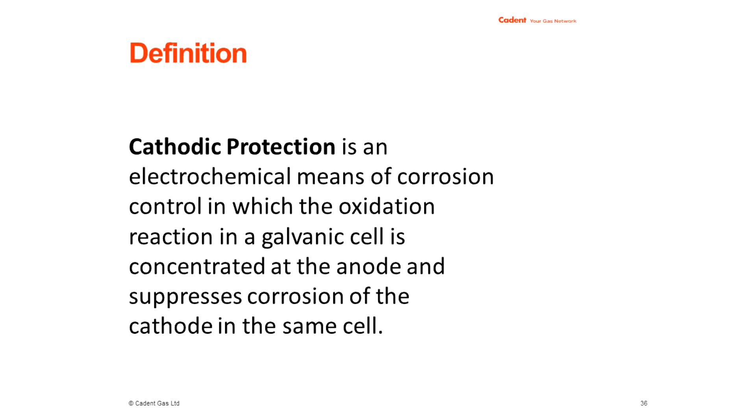If you were to Google cathodic protection, you'd get a definition that looks something like that. But essentially, cathodic protection is a system we utilize to prevent corrosion of our steel pipelines of all pressure ranges. It's not just employed by Cadent, it's used in all gas and oil industries and even the water industry.

Cathodic protection, although it's used to prevent corrosion, is merely a secondary method of protection. Our primary method of protection is the pipeline coating.

So as many of you are probably thinking, if you've got your pipelines coated, then where's the requirement for cathodic protection? Well, no matter how well a pipeline is coated, there's always going to be deficiencies in it somewhere along the line, whether it be at the valves or flanges or anywhere that's awkward to coat or apply a decent wrap to the pipe. That's where cathodic protection comes into play. At these small locations and defects in the coatings is where the CP will protect the pipe from corrosion.

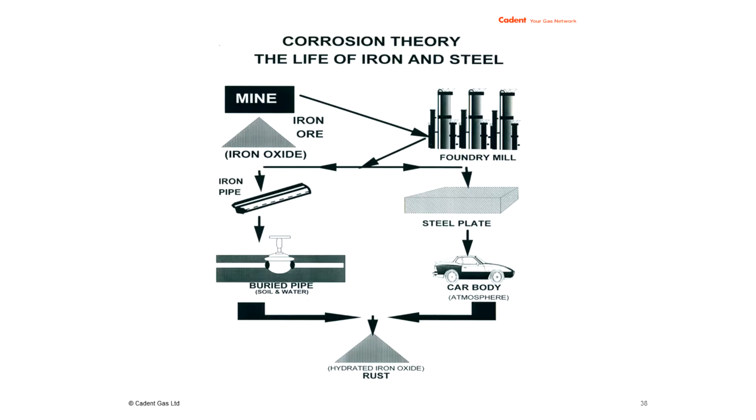There's a little bit of theory of where the steel comes from. The steel is mined in iron and comes out in the form of iron ore, and goes through foundries and various processes to eventually result in the steel that we see and recognize today, whether it be in cars or in our pipelines. But the steel will always try to return back to its original form, and it does so in the form of rust, which is hydrated iron oxide.

There are 4 requisites for this corrosion to occur. You need an anode, a cathode, electrolyte, and a metallic connection.

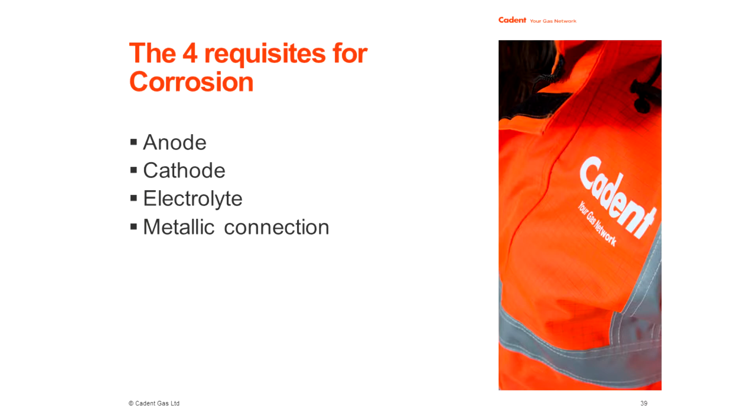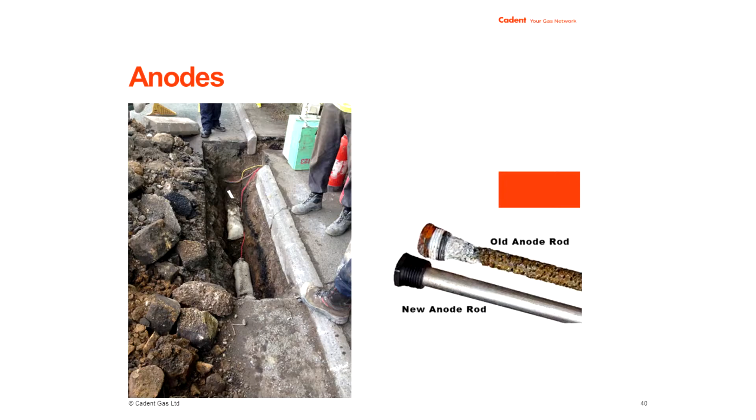So those are the anodes. The anodes are essentially what we sacrifice to protect our pipelines. You can see the anode bags in the excavation on the left-hand side there, and also the picture on the right shows a new anode rod and an old anode rod out of a heater element, so you can see the effect corrosion will have on these sacrificial anodes.

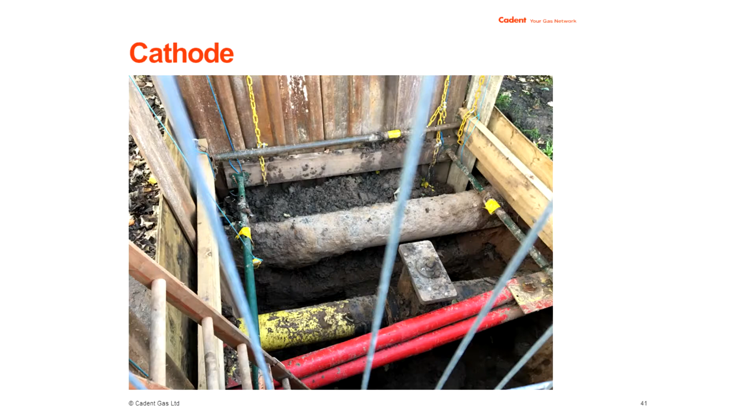The cathode is what we're trying to protect. In the picture there, in the center, you'll see a yellow pipeline running through the middle, which may look like a plastic pipe to some of you, but that is in fact one of our intermediate pressure pipelines with a plastic polyethylene coating. So the cathode is what we're trying to protect. We sacrifice the anodes to protect the cathodes.

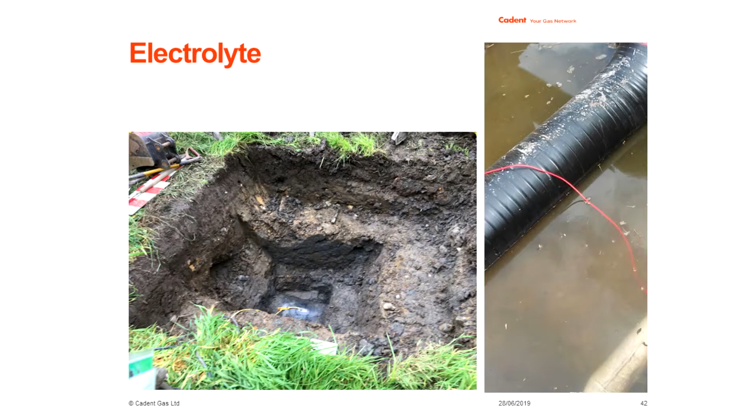For the electrochemical process to operate, you need an electrolyte. Both the anodes and the cathode need to be submerged within the same electrolyte. This electrolyte has to have oxygen and moisture to allow the current to flow. You can see an excavation there with our pipe in the middle of it, and in that case, the soil is the electrolyte. The one on the right-hand side, obviously, the electrolyte is the water surrounding the pipe.

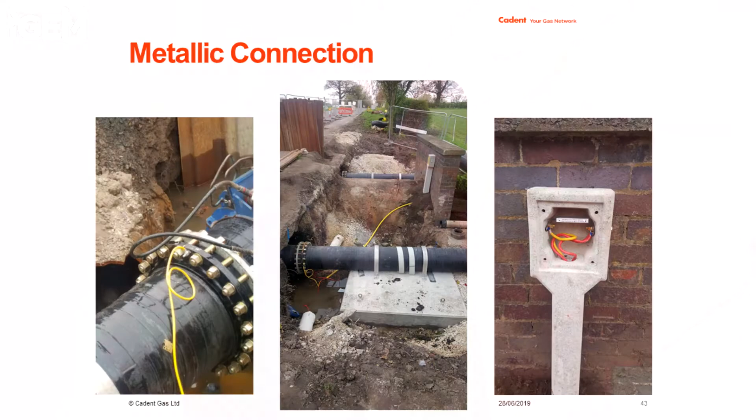You need a metallic connection. You have to complete the circuit. And this metallic connection is provided via what we employ pin brazers, where we'll connect onto the pipeline. As you can see on the left-hand side, this wire will then run through the soil into the ground and up into a test post, where there'll be more wires that also run down to the anodes. Within the test post is where this connection occurs, thus completing the circuit.

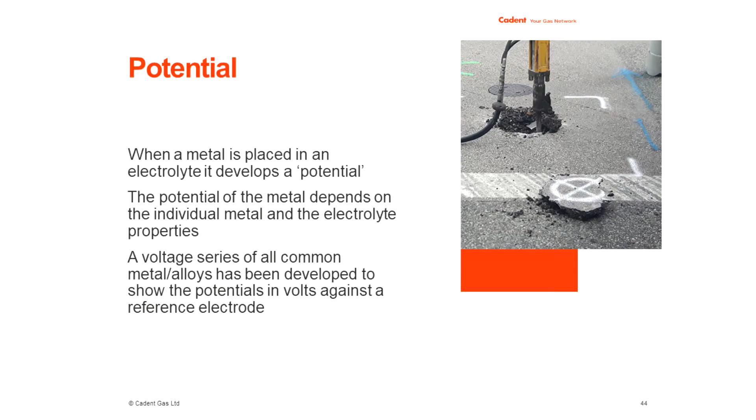So when you immerse a metal in an electrolyte, it develops a potential. The potential is basically the driving voltage that metal has. Over years, this has been put into a table, known as the galvanic series. If you just have a look at the top of the table there, commercially pure magnesium has a driving voltage of minus 1.75 volts.

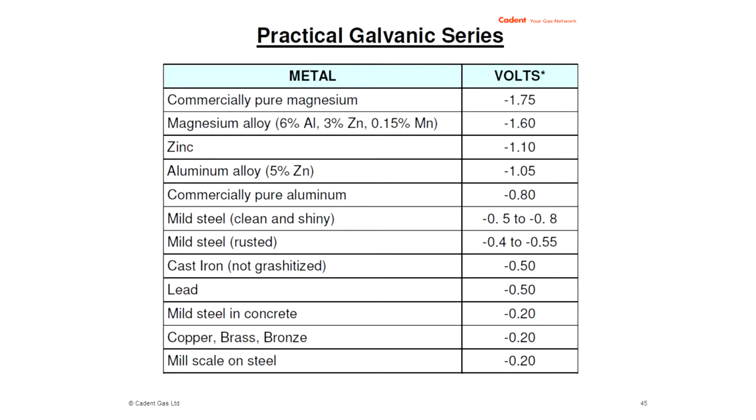And with it having the highest driving voltage, that is what we tend to use for our sacrificial anodes. Midway down the table, you'll see steel, which is what our pipelines are constructed using. And just below that, it's pertinent to note you have cast iron, which will come to light the relevance as we move through this presentation.

So when we connect the magnesium up to the steel, the driving voltage is what forces the current through the soil to protect the structure we're trying to protect. That's in our sacrificial anode systems.

We also have impressed current systems where we may use a lower graded metal on the scale, where we typically employ silicon iron rods. Now they don't have a driving voltage, as you can see, which will be in contrast to the mild steel that our pipelines are constructed of. And so in those cases, we will impress an electric current which will increase their driving voltage, and this can be utilized for our long-distance rural pipelines.

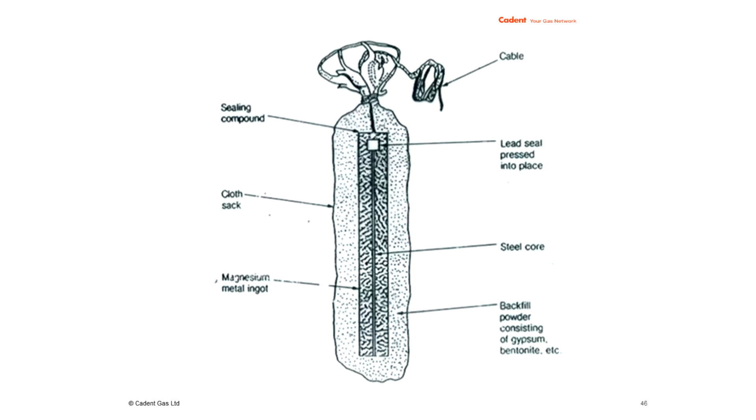So that's a cross-section of a sacrificial anode bag. It has a magnesium core down the middle, and a powder around the outside called gypsum bentonite, which helps to accentuate the current flow out of the anode into the soil and onto our pipelines.

Basically, when that reaction occurs, we will soon be able to tell if our pipelines are protected by the change in potentials. This is a cross-section of how the connection is made. You have the anodes on the right-hand side, cable going up into the test post, and down onto the pipeline, and the current flows through the soil onto the pipeline.

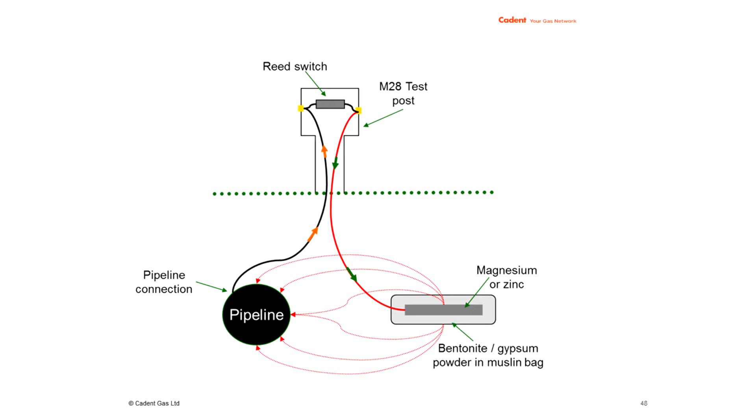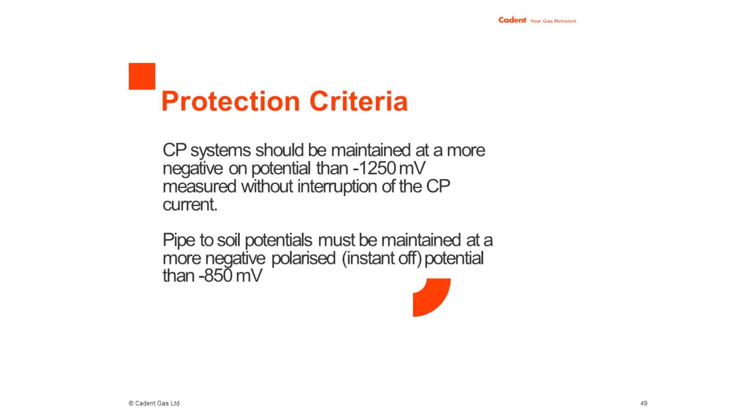So this is how we know if our pipelines are protected. There's a protection criteria applied to them. What we're trying to achieve at these test posts is a reading of minus 1250 millivolts. When we see that, we know that the pipeline is adequately protected, as it has been researched over a number of years. However, that reading has an error in it.

The error is caused by the distance between the pipe and the top of the soil, and it's known as an IR error. So to achieve the optimal level of protection, what we need to be aiming for is minus 850 millivolts, but this is at the instant that the current is switched off. So at every test post, our technicians can go along and disconnect the cables, take a reading, and if it's more negative than 850 millivolts, we're protecting our pipelines adequately.

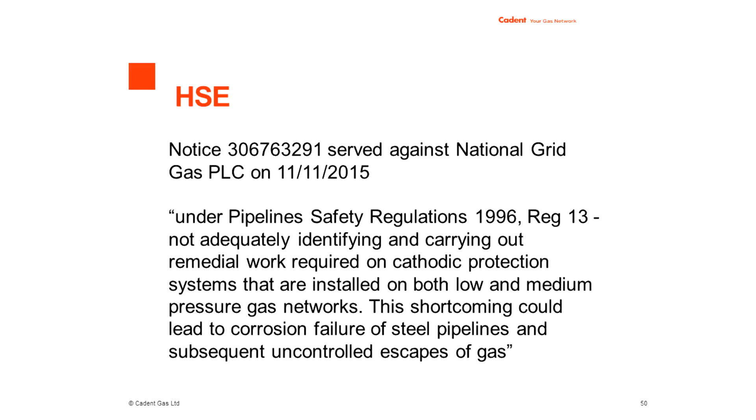So this is where the HSE are interested. Back in 2015, National Grid, as we were then, was served an improvement notice for not adequately protecting their pipelines. And this improvement notice has obviously followed through as we've become Cadent and split off.

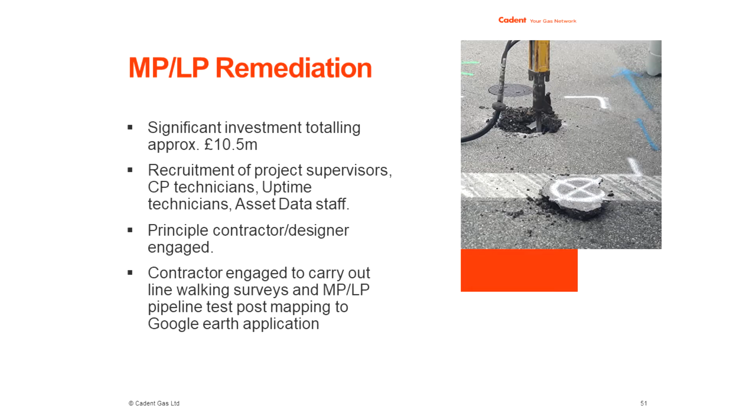So that's where the medium and low pressure remediation project originated from. We've employed this project, totaling significant investment of approximately £10.5 million, recruited more staff, engaged new contractors, new designers, and we've also engaged a contractor to map out our systems to display on a Google Earth style application where all our medium and low pressure CP systems are.

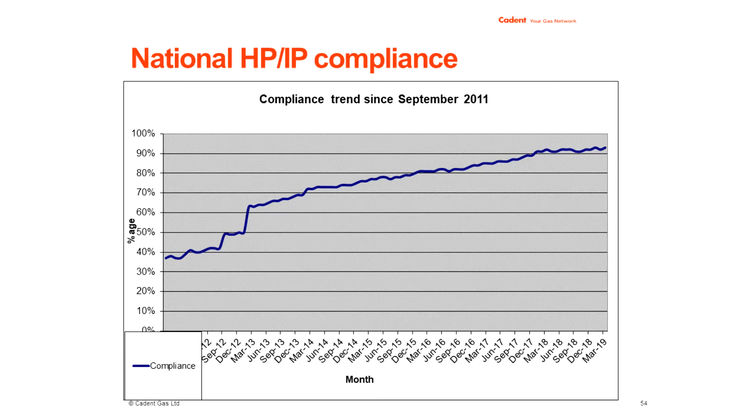The high and intermediate pressure compliance, although the HSE may not be quite as keen and scrutinising it at the moment, there was also an improvement notice served historically, and hence you can see the improvements that were made in high and intermediate pressure compliance.

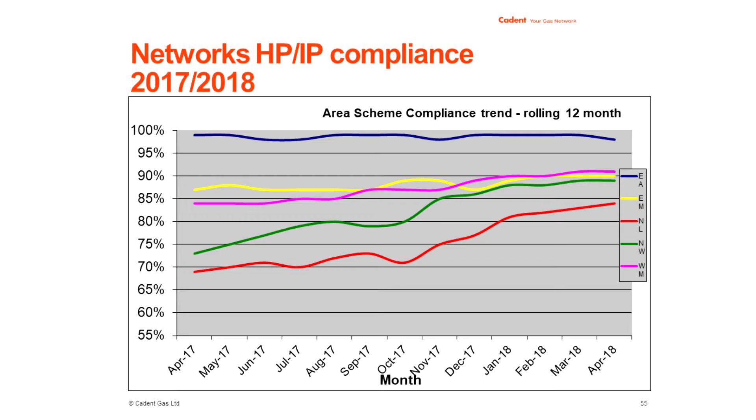So we've come across a number of challenges in trying to achieve an increase in compliance. First being contractor issues. Our contracts and procurement team engaged one contractor to design new CP systems and implement the workforce across all 5 Cadent networks originally, but however this failed. The contractor were too small and spread too thin and weren't delivering.

So in the Northwest we decided to take control of the project and do the design ourselves and use our own original contractors that we had used for the high and intermediate pressure project all along.

Another challenge we've had is data errors. Our mains replacement colleagues would come along and replace steel pipelines, insert plastic sections, and split CP systems up, but not inform that there was no communication between departments. This was showing as non-compliant test posts in every survey because our technicians would go along, take readings, and they'd be reading posts that weren't connected to steel anymore, so they'd be getting less than adequate readings. However, there was no visibility of that, so it just made us look a lot worse than it was. As part of the project, there's been a massive data cleanse, which has achieved some good results and helped with the compliance as well as the actual physical work.

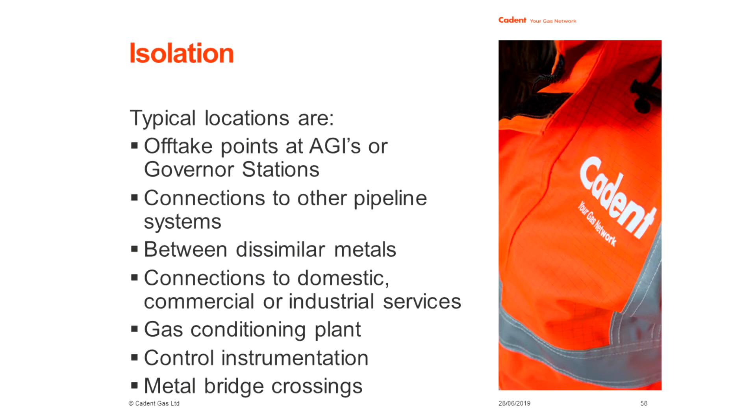Lastly, we've had issues with isolation, which I'm going to talk about now. Each CP scheme has to be isolated from other structures. As you saw in the galvanic series earlier, steel is higher up the scale than iron. We also have a lot of iron pipe, so we need isolation between our steel pipes and our iron pipes. If you don't have the isolation, the steel will corrode and will in effect become a sacrificial anode for the cast iron. So one of our major issues has been isolation.

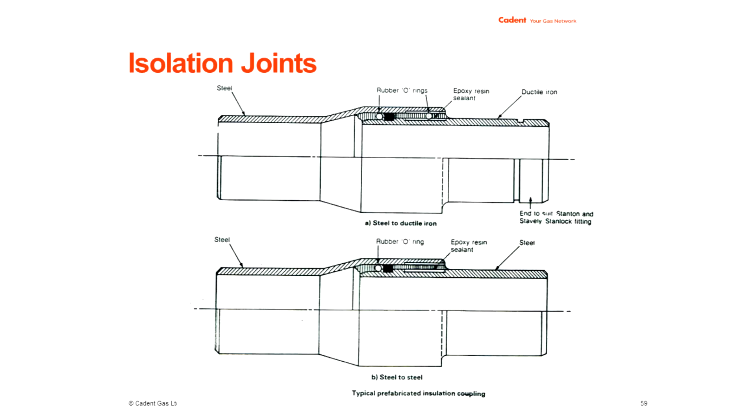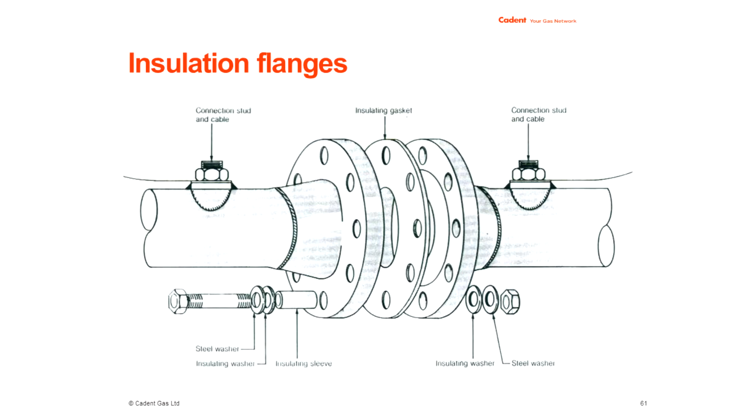In our medium and low pressure networks, we tend to have a lot of insulation flanges. These flanges should be above ground, but unfortunately our iron and steel interfaces tend to be below ground a lot of the time. So they've caused us a lot of issues over the years as the insulation flanges have become conductive due to moisture ingress, and we've lost all isolation between the steel and the cast iron.

We also have isolation fittings on our above ground installations, because although we can lose it between iron and steel and other materials, we can also lose our cathodic protection along our instrumentation lines and any cabling on site, which will then cause us to lose our cathodic protection down the electrical power earth.

One issue we've had is a skills gap or a lack of training. Some of our colleagues have been stripping out isolation fittings without realizing what they were. Some AGIs historically have been designed without any isolation fittings.

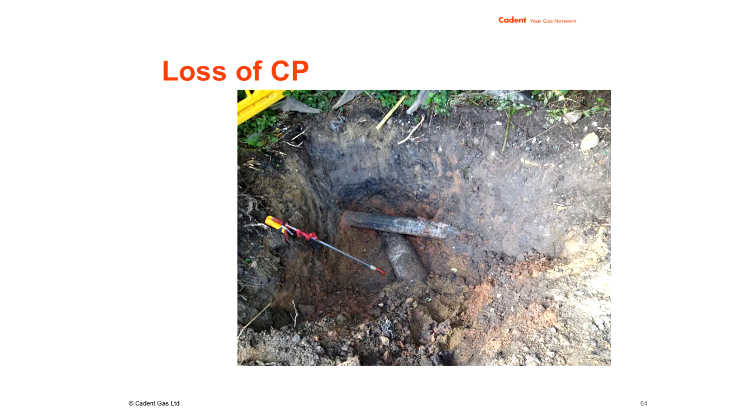We've also lost CP through a number of own goals. That picture there shows a water main, which was a fire hydrant ring main on one of our AGIs, laid on top of another one of our steel pipelines. Luckily it was decommissioned so we could cut it out and restore the CP on that site.

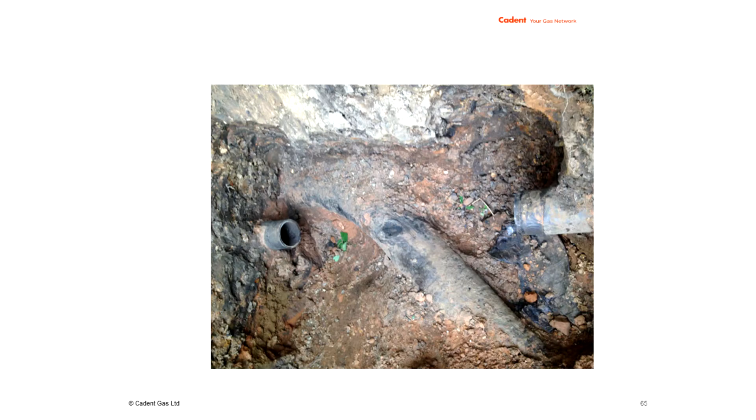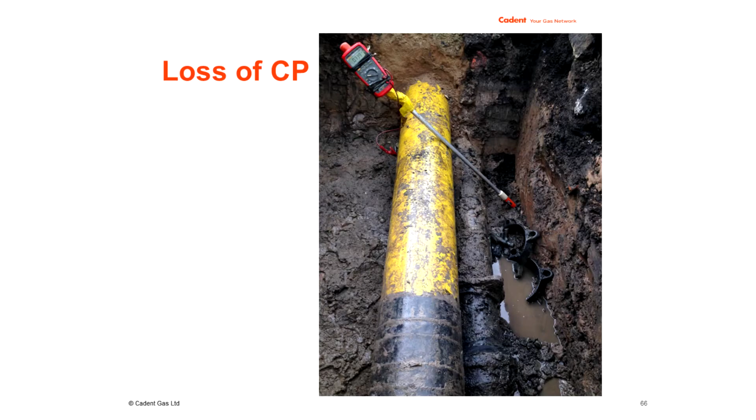This one is an ironic situation because the yellow pipe is an intermediate pressure pipeline that was laid on top of a medium pressure cast iron pipeline so that we could decommission the medium pressure one. However, straight away the CP was lost, and it took years to locate the touch points and then smash off the cast iron sections that were in contact.

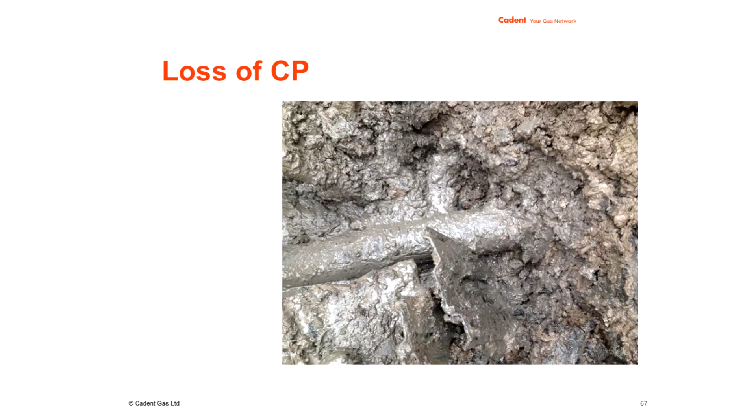That picture depicts a steel sheet pile driven into the ground adjacent to one of our pipelines, if you can see it in the center of the picture. Other than being a major near miss, that also caused a drain on the cathodic protection. As you can see, when the sheet pile was removed, that's the imprint it left on the pipe.

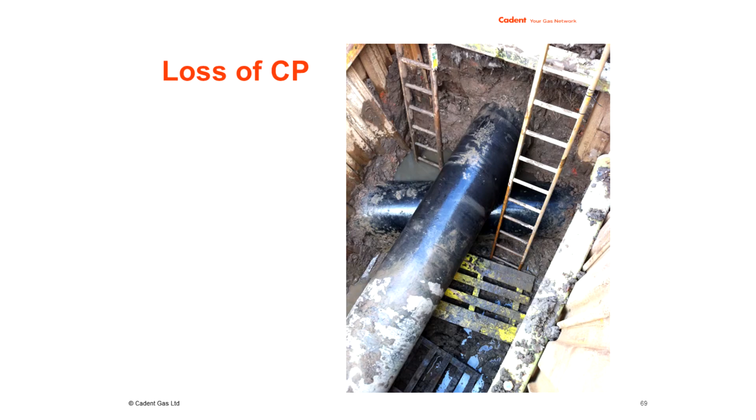And this is a 24-inch high-pressure pipeline that was constructed back in the British Gas days and laid directly on top of a water main. Luckily, that was another main that was decommissioned, so we could smash it out and restore the CP to the high-pressure pipeline.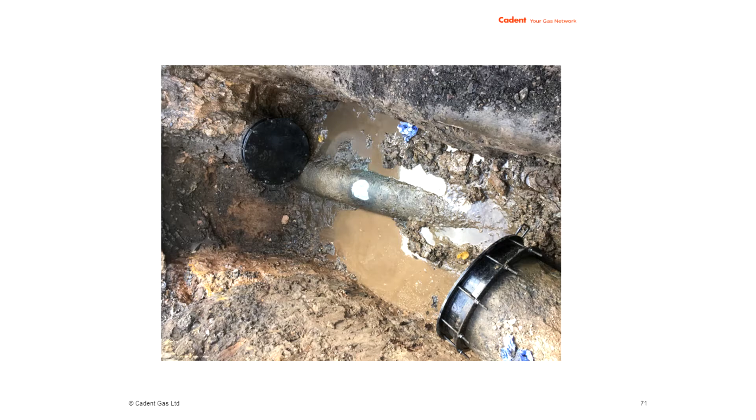And that's it, thank you. Any questions?

Thank you for your presentation - a really good description for a non-engineer like me of cathodic protection. I was interested, you didn't talk about anything you'd done with other networks, either in terms of researching and benchmarking or sharing afterwards. Can you talk a little bit about that?

Yeah, so across the 5 cadent networks, we have a monthly report that comes out from our integrity department that stipulates where we're at and how everyone's performing, as you can see from the graphs I've shown. We've had process improvement meetings with the other networks, and originally when we were all using the same contractor, we all had the same issues. However, with the Northwest pulling out, we've shown a drastic improvement using our own contractors and bringing the design back into the Northwest, whereas the other 4 networks have continued to use the same contractor and continue to complain about the same issues. So there is some communication, and we do share best practice.

Lance, can I take you back to the challenge statements that you brought up there? What personal involvement did you get into there with the solutions against those particular challenges?

With the contractor issue, I'd been helping to manage the high and intermediate pressure remediation the year before. We'd been doing the design for the high and intermediate pressure pipelines and issuing it out to contractors within the Northwest Pipelines team for a year, and we'd shown great improvements. When we then had this other contractor imposed on us and things didn't go so well, I suggested we employ the same techniques we'd used on the high and intermediate project on the medium and low pressure project.